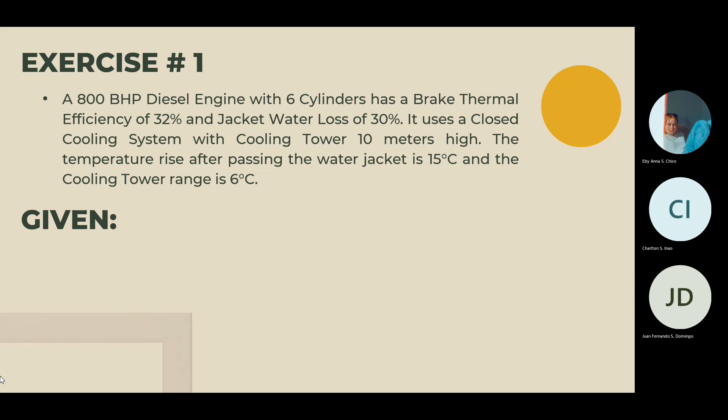So, what is required is the capacity of jacket pump, exhaust loss, then cooling tower flow rate, and the size of electric motor. So it's not indicated here, but at least that's what's being asked in this problem. First, what is the capacity of the pump, what is the exhaust loss, the cooling tower flow rate, whether it is mass flow rate or volume flow rate, or electric motor. Wait, class, okay?

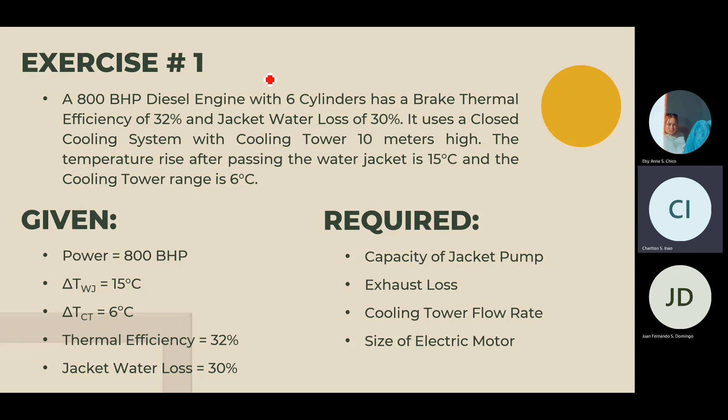So how do we do that? What we do is, output over input is efficiency. So input is output over efficiency. Dividing a number by a decimal increases it. So 596.8 kilowatt divided by 0.32. Where did I get the 0.32? That's the efficiency mentioned. That's it, 0.32, 32%. So that's our efficiency. So we divide the output by the efficiency to get the input. So this is now the input.

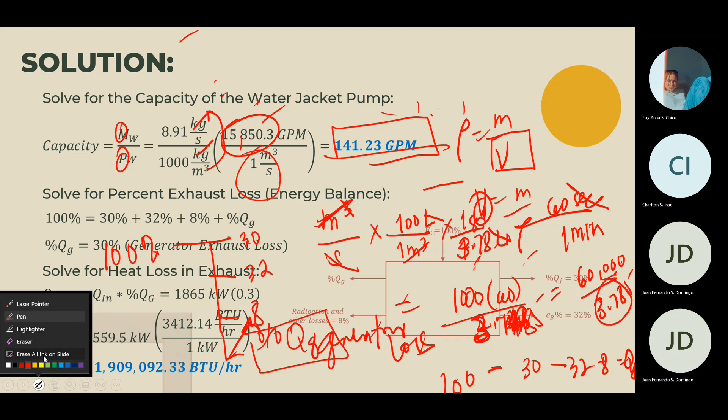So ito yun, sa heat balance. Meron kang 100 na pumapasok, di ba? So this is 100%. And then this is sa jacket, water jacket, 30%.

Dahil meron ding dito na brake thermal efficiency, 32%. Ito naman ay radiation and other losses, 8%, yung mga heat transfer losses.

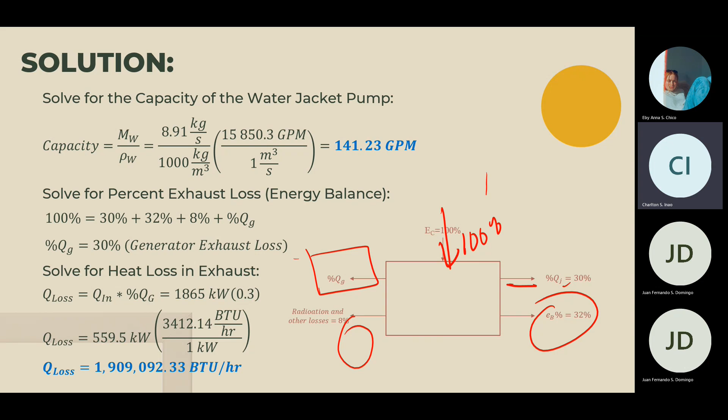So magkakaroon ka ng percent na generator loss, which is yan, na convert mo. That is 1,909,092.33 BTU per hour.

So ano naman yung flow rate ng cooling tower? Yung cooling tower na magbibigay ng tubig sapat, para hindi umaasa sa ibang linya like ng Nawasa o Maynilad. So eto, yung kanina nakuha natin na capacity, 141.23 gallons per minute.

Convert natin yan, so there is 227.12 liters per hour, yung kinumpit natin kanina. So dun lang umiikot yun. So what will happen here is that GPM and GPM will be canceled out. And then finally we have this 32,076.

32,076 liter per hour. So liter per hour na yan, 32,076 liter per hour.

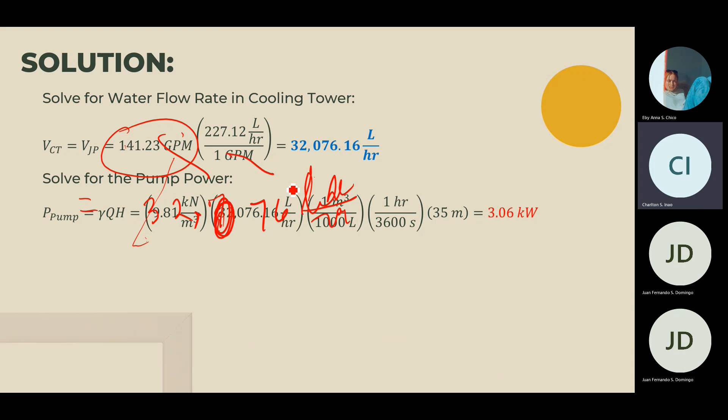So paano naman yung pump power? Anong formula doon? Di ba yung power is Q gamma H. Ayan o, Q gamma H.

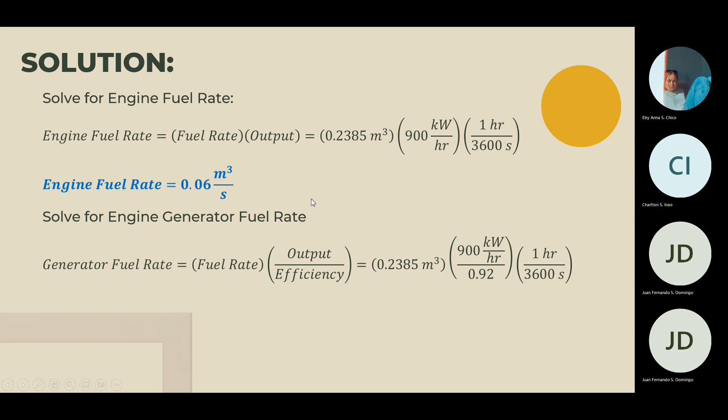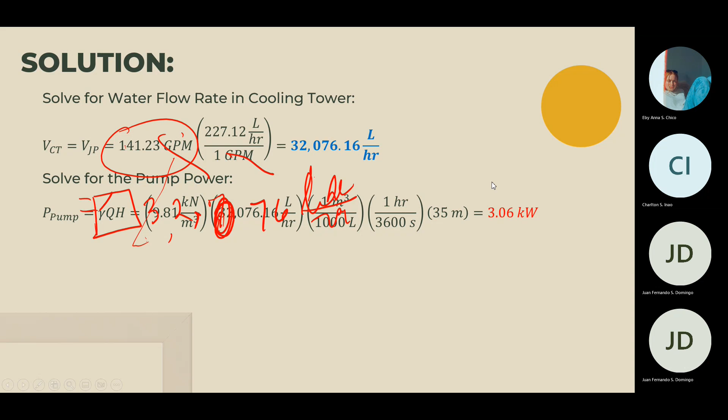So saan na tayo? So ang water power ay Q gamma H. So meron ba tayong Q? Yung water power is yung power ng pump. So Q gamma H, meron tayong density ba to? Okay, density.

Tapos ito na yung flow, di ba? 32,076.16 liter per hour. Then you have to convert because yung mga other units are already converted. Wala na tong meter cube. Yung liter ay 1,000 liter ay 1 meter cube. So matatanggal na yung meter cube.

So ang susunod natin ay yung time element. Yung hour, i-convert natin ng seconds. So 1 hour is 3,600 seconds. So lalabas dyan yung kilojoule per second kasi yung kilonewton is kilojoule per meter. So matitira dyan is kilojoule per second, which is kilowatt. Ang power ng pump ay 3 kilowatts.

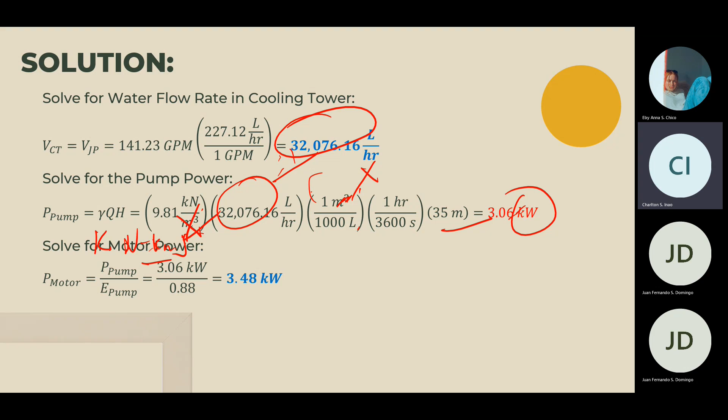So how do we solve the motor power? Ibig sabihin, mas malakas dyan yung motor kasi input yun eh. Mas malakas dapat yung ibibigay niyang input kasi yan na yung output ng pump. So ganito yan eh. Ito yung motor. Ito yung pump.

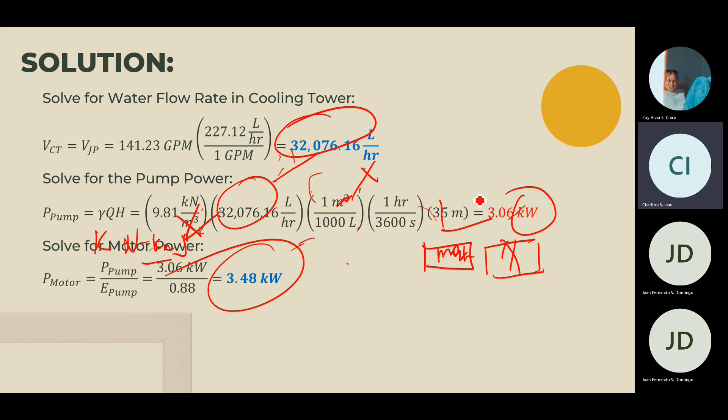So 3.48 is the power or capacity of the motor that drives the pump. Okay? So, that's it.

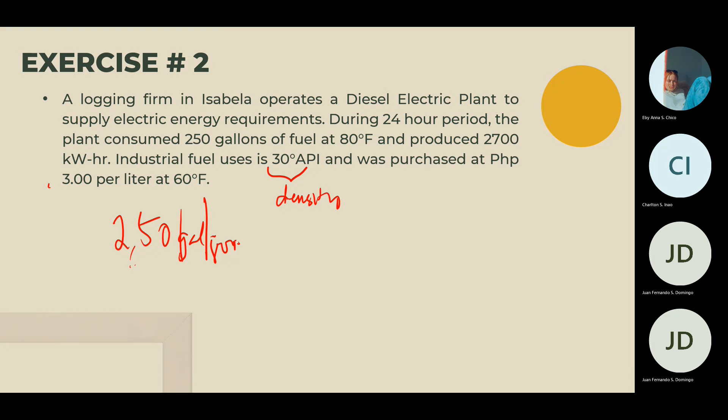What does that mean? This is what's called density - there are formulas in fuels and combustion that directly use API, so you have to use that if you want to apply it. So 30 degrees API, purchased at 3 per liter at 60 degrees Fahrenheit. Okay.

So let's segmentize that - the temperature, 60 degrees Fahrenheit, convert to degree centigrade is 15.6. The other temperature given is 80 - what we consumed, 250 gallons, at 80 degrees Fahrenheit. Converting that to metric is 26.6.

Then the volume is 250 gallons, which you can convert to liters later. And the API is 30. Whatever we get, at least that's the given - 250 gallons at 80 degrees. So what is being asked here?

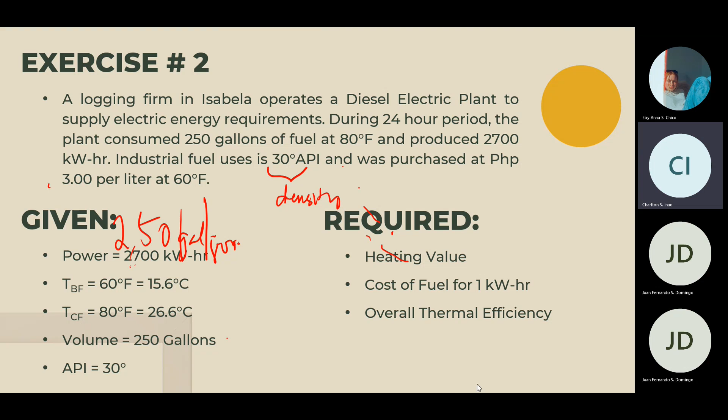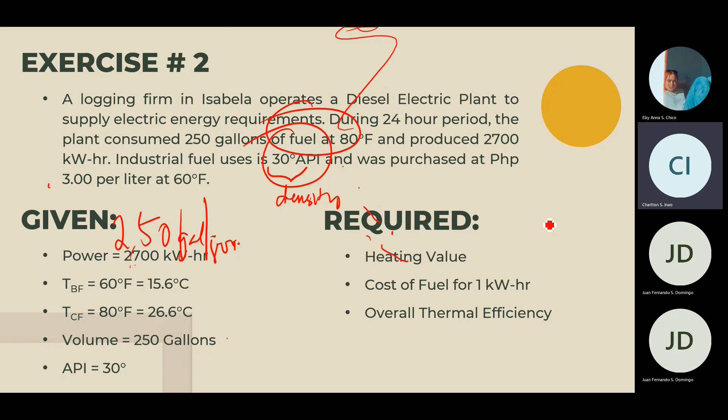Be careful, because this is what our guide wants us to solve: heating value, then cost of fuel for 1 kilowatt hour, and then overall thermal efficiency. Those are the basics. For heating value, since you're given the API, once you have the API, you can compute the higher heating value - if you know the formula. Then cost of fuel for 1 kilowatt hour, then overall thermal efficiency - there's actual data for that.

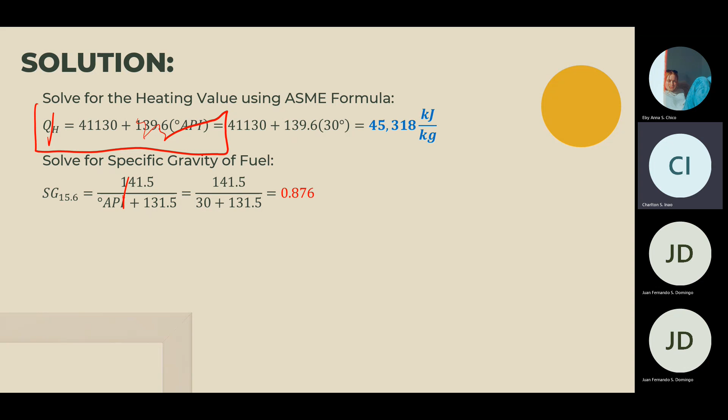So for the heating value, what's the formula? For heating value, given the API, we solve for the specific gravity of the fuel. The formula is: 141.5 divided by (API plus 131.5). Let's solve it quickly: 141.5 divided by 30 degrees API plus 131.5. All you have to do is substitute the API.

If you substitute the values, you get 0.876. That's the specific gravity at 15.6 temperature. So that's already the specific gravity, already computed.

Let's see how the specific gravity at 26.6 is computed, since it's almost the same. The formula is: 1 minus 0.0007 times t minus 15.6.

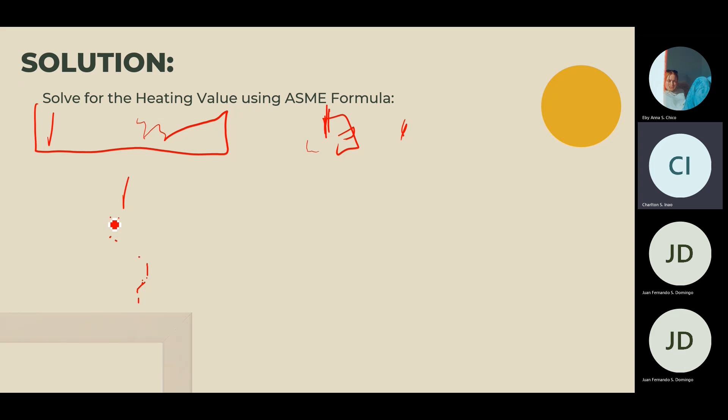So the heating value formula given by ASME, as used in combustion or fuels and combustion topics, is: 41,130 plus 139.6 times degrees API. Okay, so that's the formula - 41,130.

Solving the formula for flow rate - mass is density times volume. So we have to convert - to get the mass, we divide the volume by the time. So 250 gallons consumed over 24 hours gives us gallons per hour.

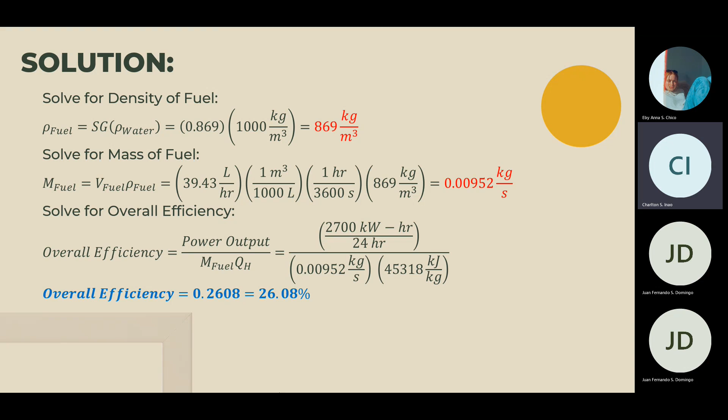The average indicated thermal efficiency of a two-cycle diesel engine driving a generator in a power plant is 52%. The fuel has a heating value of 16,000 BTU.